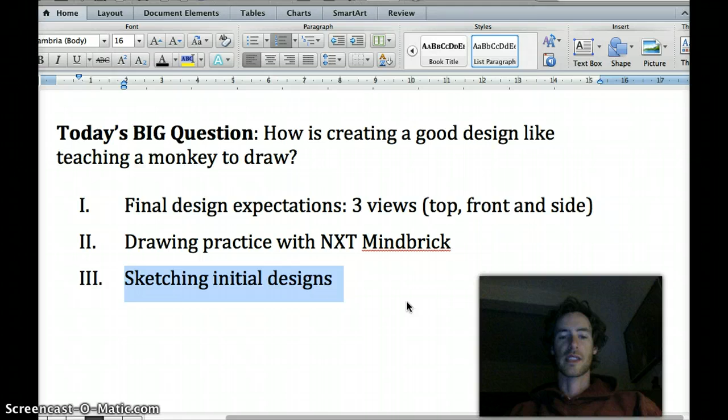When you do that, I want you to take a look at this. This right here is a representation of an artist's sketch of some designs of a razor that you use to shave with. These are initial designs — this is the artist working out his or her ideas.

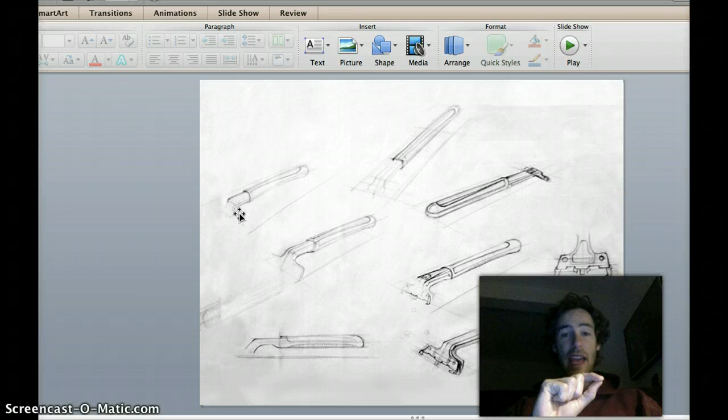What I want you to get from this is 3 things. One, you can see that the artist uses very light pencil strokes, especially on these initial designs, pressing very lightly on the page, and using long flowing strokes. The long flowing strokes allow you to emphasize shape and form, and the light strokes allow you to make mistakes and correct them without having to erase them from your page.

Because the idea is that you want to document your process as you're drawing in the initial design process. So that's what we see here: long flowing lines, and very light strokes.

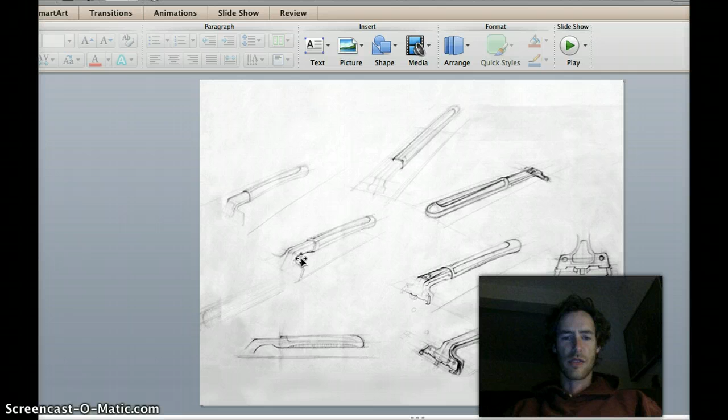If you could get closer on this, I wish I could blow it up even more so you can see it — I'll show it on the board to you. But you'll see there are some very faint light lines that have been mistakes that have been corrected by other lines, and the artist is just leaving them in there to represent their process.

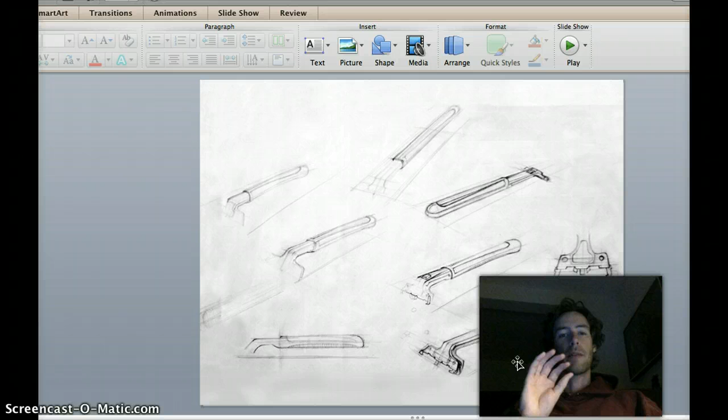Because we want you to document your process of design, you're going to put away the eraser, so you're not going to be erasing and leaving smudges across your page. You're going to be using light lines, long flowing lines to emphasize shape and form, and those light lines will document the process so that if you make a mistake, you can always fix it by putting another line over it.